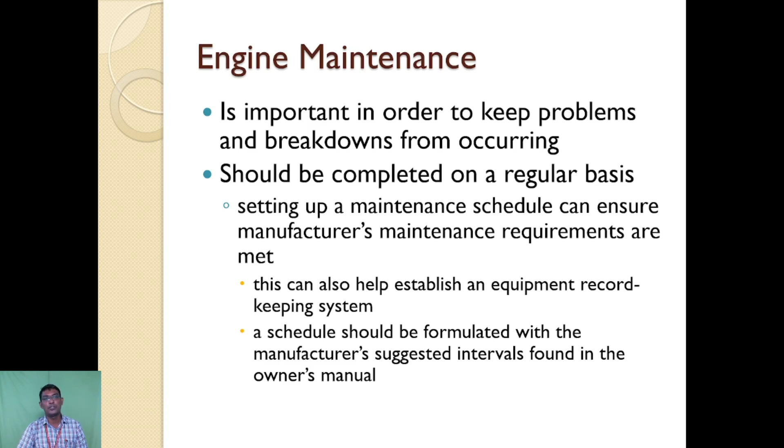First, you should know about engine maintenance. What is engine maintenance and why do we go for it? Because engine maintenance is very important in order to keep problems and breakdowns from occurring. It should be completed on a regular basis, so periodically we should undergo inspection. Setting up a maintenance schedule can ensure manufacturer's maintenance requirements are met. This can also help establish an equipment record keeping system. A schedule should be formulated with the manufacturer's suggested intervals found in the owner's manual, meaning the maintenance manual prescribed by the concerned authority. This is the main purpose for undergoing engine maintenance.

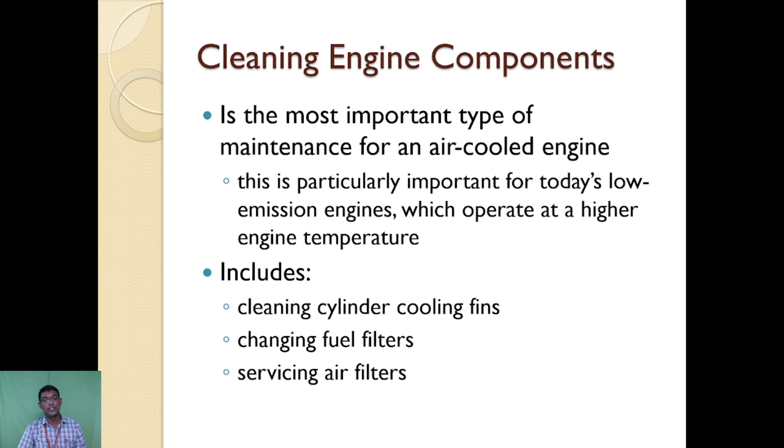Let us see cleaning of engine components first. This is the most important part of maintenance for an air-cooled engine system. This is particularly important for today's low emission engines, which operate at higher engine temperatures. This includes cleaning of cylinder cooling fins, changing of fuel filters, and servicing of air filters.

Let us see cleaning of cylinder cooling fins. This is very important in order to properly maintain the transfer of heat, so that the cylinder cooling fins are properly actuated. The fins around the engine and on the cylinder head act as a heat transfer medium. The heat already generated by combustion travels through the fins to the atmosphere. This is why we clean the cylinder cooling fins. Accumulation of dirt, particles, impurities or debris on the fins acts as an insulator which blocks the transfer of heat.

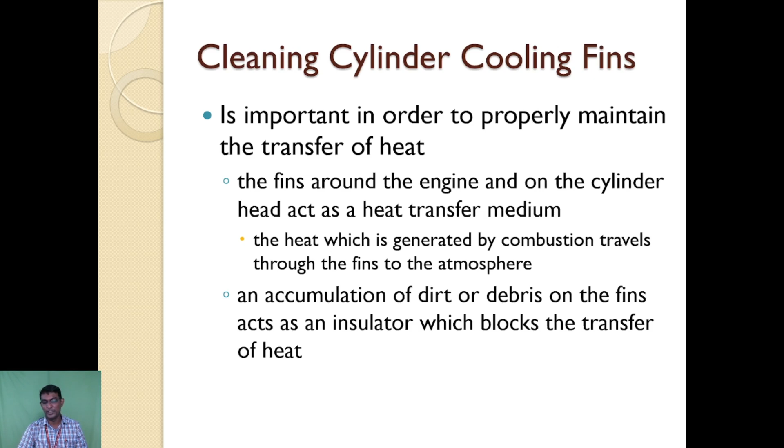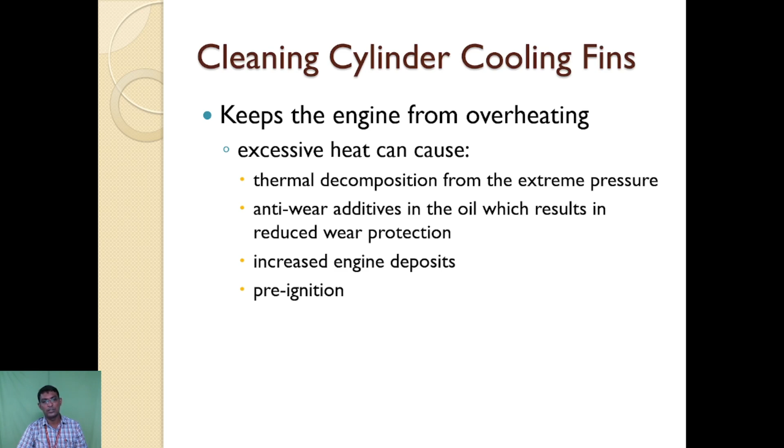This is also very important in keeping the engine from overheating, because excessive heat can cause thermal decomposition from extreme pressure conditions, and degrade anti-wear additives in the oil, resulting in reduced wear protection. It also increases engine deposits, as impurities can sediment in the cylinder cooling fins, and finally pre-ignition can occur.

Next case, changing of fuel filters. What is the purpose and necessity? Changing of fuel filters should be completed on a regular basis as said already. A completely blocked fuel filter will stop the engine from running. A partially blocked filter can cause the mixture to be very lean, which is a major cause of piston seizure, scuffing, or overheating failure.

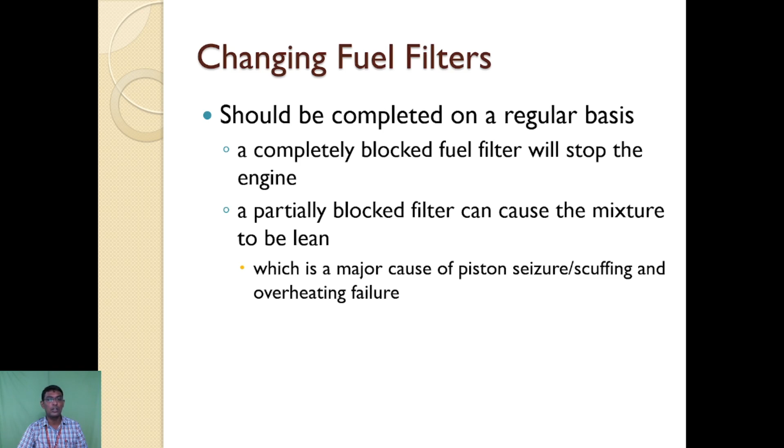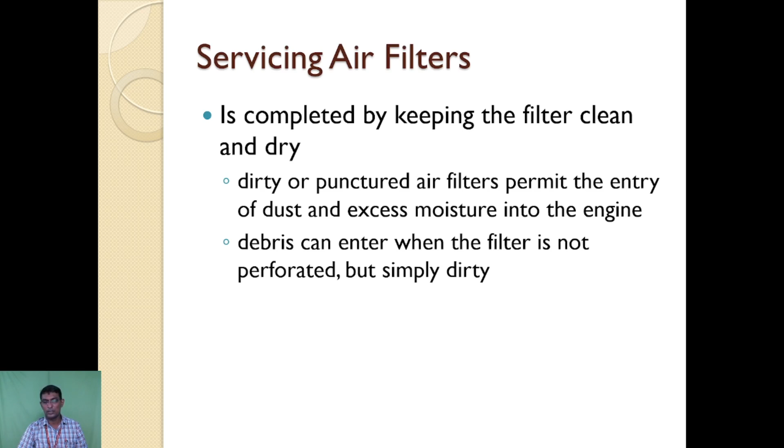Next, servicing of the air filter system. This process is completed by keeping the filter clean and dry. Dirty or punctured air filters permit the entry of dust and excess moisture into the engine system. Similarly, debris such as impurities and other substances can enter when the filter is not perforated properly but simply dirty. For that purpose, we service the air filters periodically.

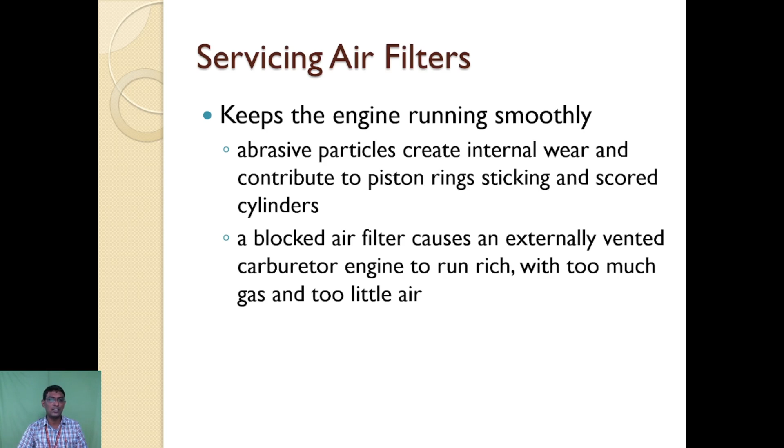This keeps the engine running very smoothly. Abrasive particles create internal wear and contribute to piston rings sticking and scored cylinders. These are the possible limitations addressed by servicing the air filters to keep the engine running smoothly. A blocked air filter causes an externally vented carburetor engine to run rich, with too much gas and too little air.

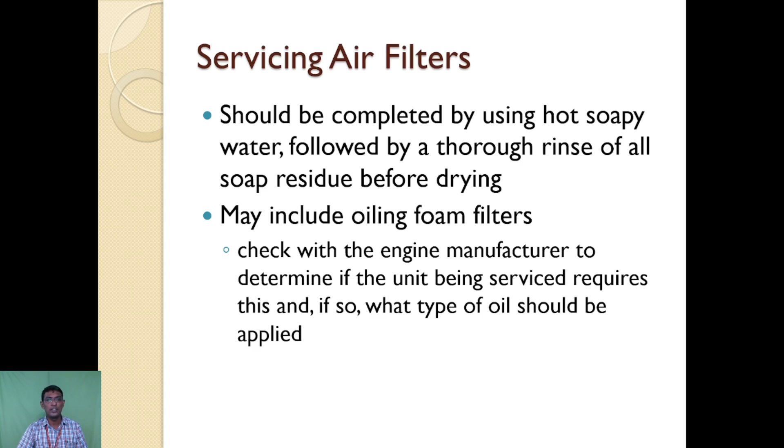Servicing should be completed using hot soapy water, followed by a rinse of all soap residue before drying the system. This may include oiling foam filters, so check the engine manufacturer manual to determine if the particular unit being serviced requires this, and if so, what type of oil should be applied. This is the condition to be followed during servicing of the air filter system.

Next, we are going for the carburetor.

Usually, the spark plug electrode area typically operates in the condition between the ranges of 700 degrees Fahrenheit and 1500 degrees Fahrenheit. Less than 700 degrees Fahrenheit normally will cause a buildup of carbon, which will short or foul the spark plug, and sometimes eventually stop the engine from running.

Similarly, around 1500 degrees Fahrenheit, the spark plug center electrode will begin to glow, causing the combustion mixture to ignite before the spark occurs or is created. That is the pre-ignition system.

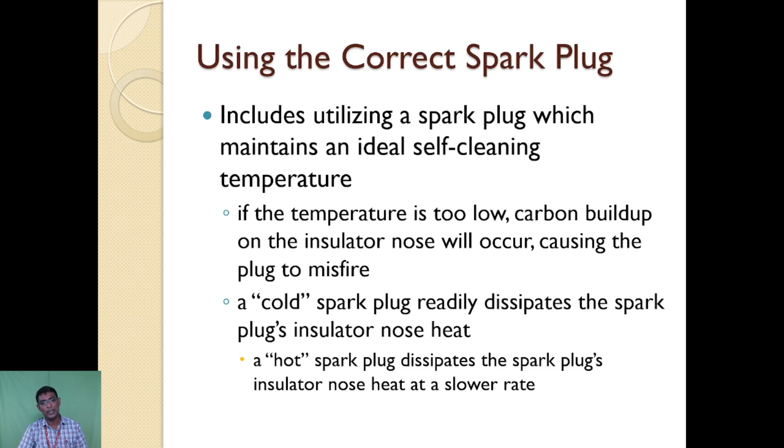This includes utilization of a spark plug which maintains an ideal self-cleaning temperature. If the temperature is too low, carbon buildup on the insulator nose will occur, causing the plug to misfire. That is what happens in the case of low temperature. Similarly, a cold spark plug readily dissipates the insulator nose heat, whereas a hot spark plug dissipates the insulator nose heat at a much slower rate.

Next, let us come to the carburetor. Servicing of the carburetor is important for the engine system. This should be included in a regular maintenance schedule, which includes carburetor adjustment, rinsing as well as cleaning, initial inspection, inspection of fuel inlet screens, and inspection of fuel bowls and float.

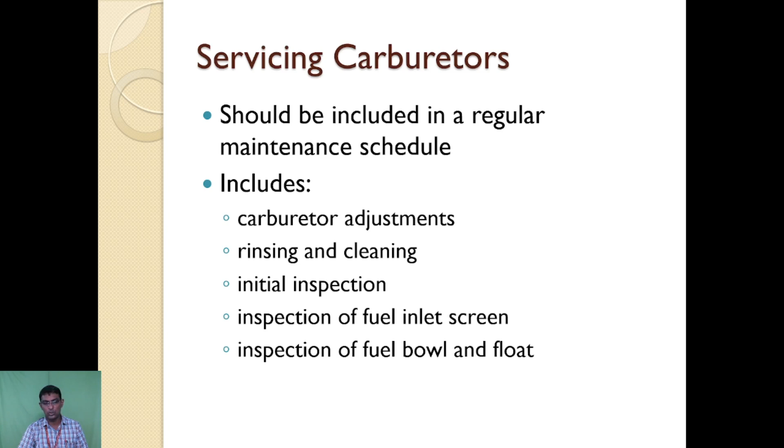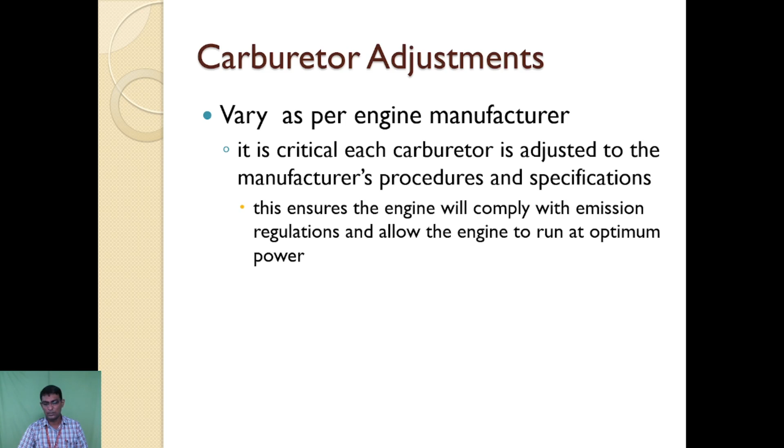Carburetor adjustments vary as per the engine manufacturer. It is critical that each carburetor is adjusted to the manufacturer's procedure and its corresponding specification. This ensures the engine will comply with emission regulations and allow it to run at optimum power. For that purpose, we have to adjust the carburetor periodically as per the manual. This is an important part of engine performance.

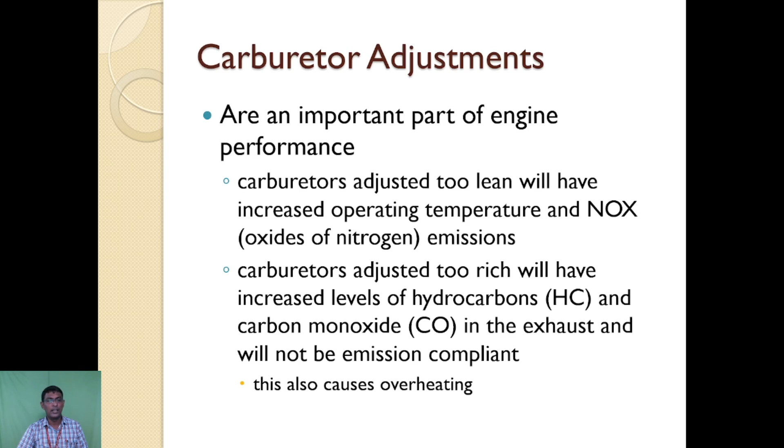Carburetors adjusted too lean will have increased operating temperature normally, and NOx, which is oxides of nitrogen emissions, will increase. Carburetors adjusted too rich will have increased levels of HC, such as hydrocarbons, and CO, carbon monoxide, in the exhaust, and will not be emission compliant. Similarly, this also creates overheating.

This may not be completed on all engines. Many small engines being produced today come equipped with non-adjustable carburetors, so we cannot adjust the carburetor on our own. Some small engines continue to use adjustable carburetors, where the low-speed and high-speed mixture needles are covered with a limiter cap.

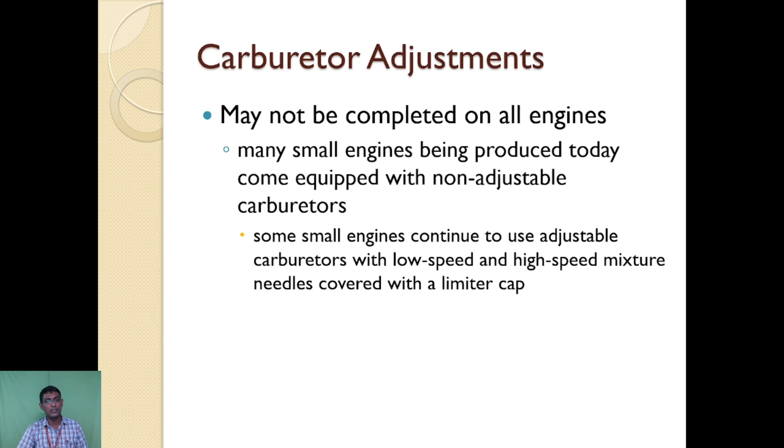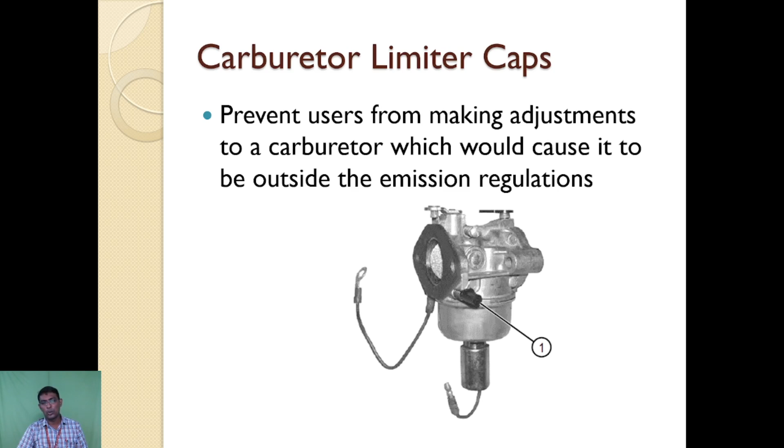This figure shows the carburetor with the limiter caps. What is the use? It prevents users from making adjustments to a carburetor that would cause it to fall outside the emission regulations. So whatever the type may be, we should follow the emission regulation protocols, without which we cannot adjust the carburetor on our own.

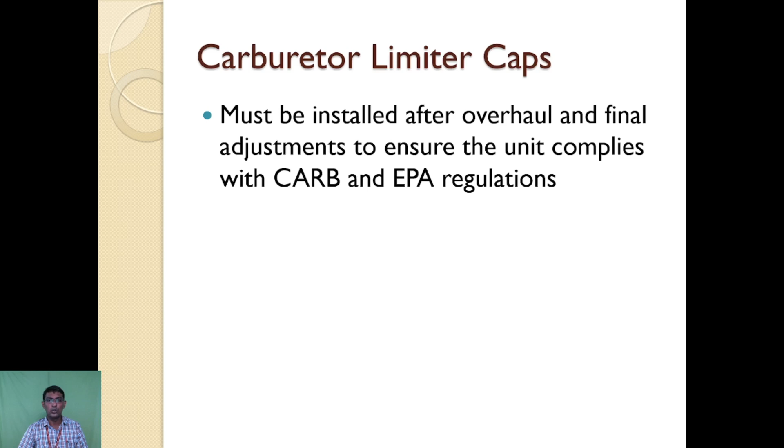Carburetor limiter caps must be installed after overhauling and final adjustments to ensure the unit complies with CARB as well as EPA regulations. So we should follow both of these regulations.

Next, rinsing as well as cleaning. Rinsing and cleaning plays a very important part in overhauling and maintenance. This is basically completed by using an ultrasonic cleaner, which is normally available in all maintenance areas and is the preferred method for cleaning carburetors and fuel system components. It may also be completed using an approved cleaning solvent.

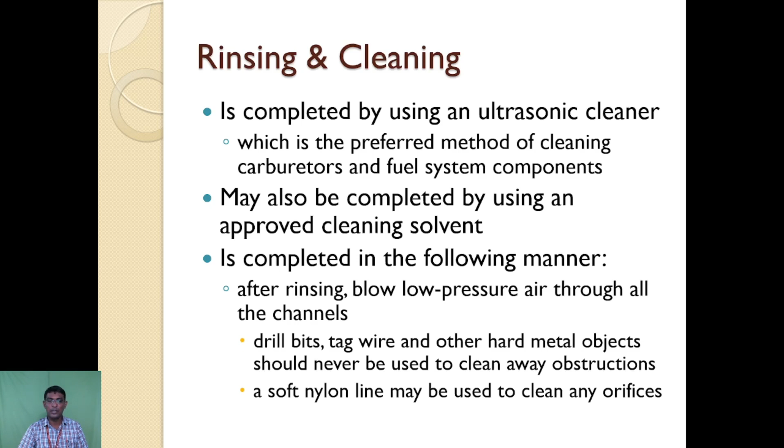This system is completed in the following manner: after rinsing, blow very low air pressure through all the channels. Drill bits, tag wire, and other hard metal objects should never be used to clean away obstructions. A soft nylon line may be used to clean any orifice paths.

Next, the fuel inlet screen. Inspect the fuel inlet screen in order to keep the carburetor functioning properly, and to verify the screen is not clogged. A clogged screen will restrict the fuel flow, affect acceleration, and impair high-speed performance.

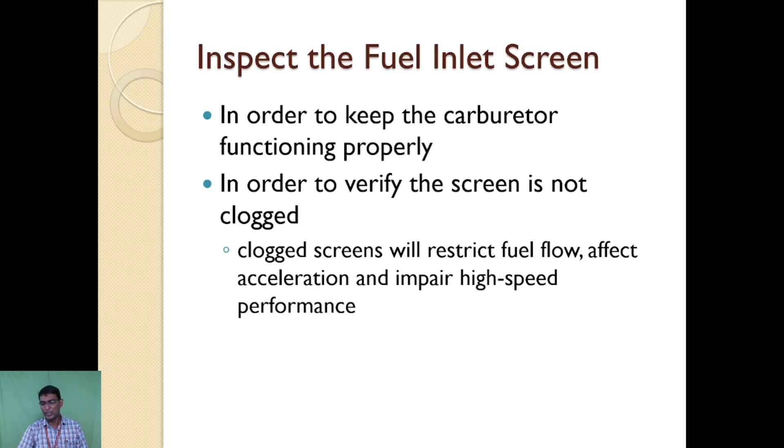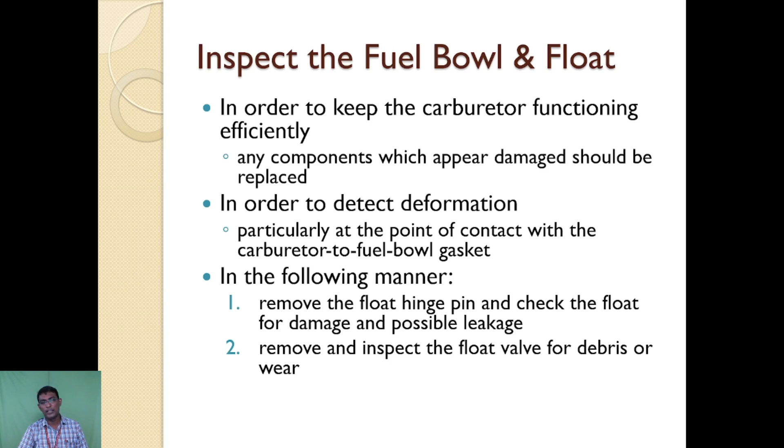In order to keep the carburetor functioning efficiently, we have to concentrate on the following points: any components which appear damaged should be repaired or replaced. To detect deformation, particularly at the point of contact, we should thoroughly check the carburetor to fuel bowl gasket. Remove the float hinge pin and check the float for damage as well as possible leakages. Remove and inspect the float valve for debris as well as wear.

Next, we are going to deal with the EFI, the electronic fuel injection system, and how to service and maintain it. EFI includes maintaining the tank such as the petrol tank, fuel pump, filter, throttle body as well as injector.

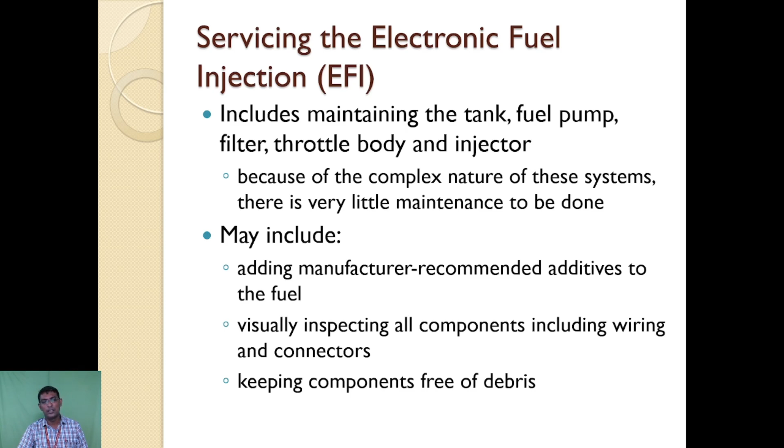Because of the complex nature of the system, there is very little maintenance to be done to rectify the problem. This may include adding manufacturer recommended additives to the fuel, visually inspecting all components including wiring and connectors, and keeping the components free of debris such as dirt and impurities.

Next, engine storage: preparing engines for storage condition. It's an important point to keep the engine running smoothly, since a season of bad storage can do more damage than several seasons of operation. Similarly, damage from rust and corrosion, plugged carburetor passages, and stale fuel can lead to problems the next time the engine is used. It includes preparing the fuel tank and fogging of the engine.

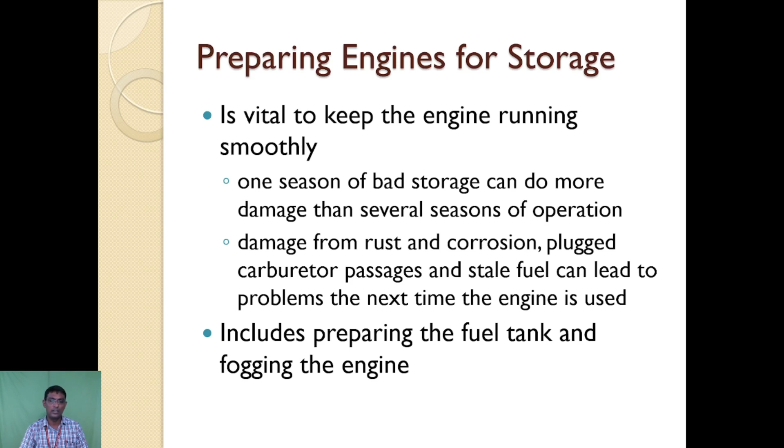Next, preparing the fuel tank. This includes completely draining all the fuel from the fuel tank as well as from the carburetor. During in-season use, fuel additives can be added to fuel to decrease the oxidation process. The additive is only effective if it is added to fresh fuel.

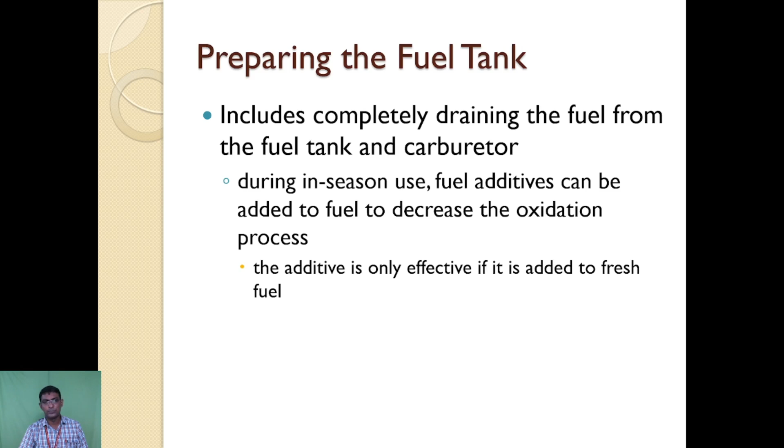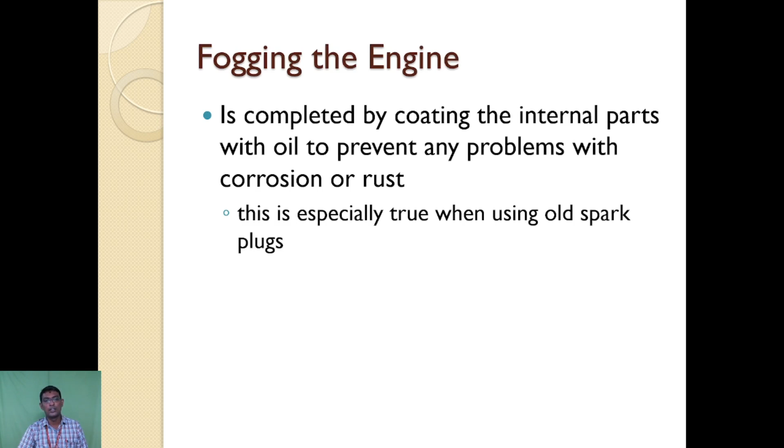Next, engine fogging. The fogging concept is completed by coating the internal parts of the engine with oil to prevent any problems with corrosion or rust. In simple terms, to prevent corrosion or rust, we can go for engine fogging. This is especially true when using the old spark plug condition.

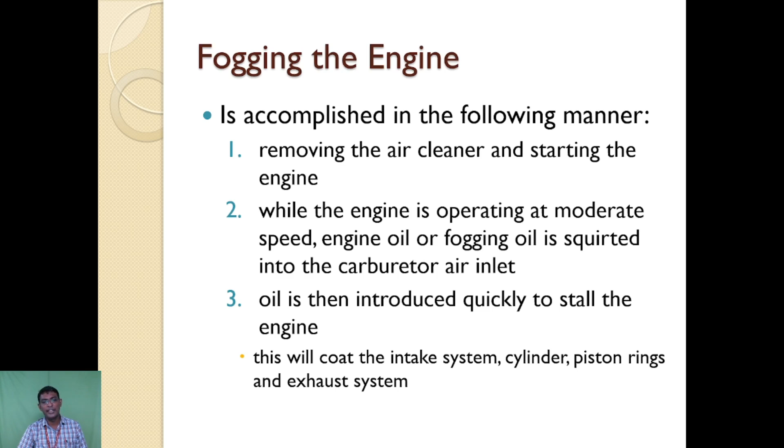Steps to be accomplished for fogging the engine: remove the air cleaner and start the engine. While the engine is operating at a moderate speed, engine oil or fogging oil is normally squirted into the carburetor air inlet, then oil is introduced quickly to stall the engine. While doing this process, this will coat the intake system, cylinder, piston rings, and exhaust system.

Then servicing of ECP, emission control parts, which includes the exhaust system, spark plug, fuel tank, fuel feed line, air filters, carburetors, ignition module, as well as flywheel. Next we move on to the case for fuel tank permeation.

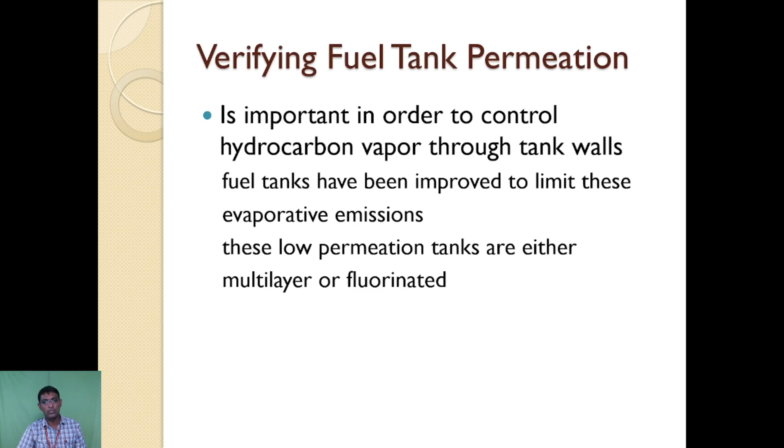It's very important to control the hydrocarbon vapor through tank walls, which normally occurs. Fuel tanks have been improved to limit these evaporative emissions. For that purpose, these low permeation tanks are either multi-layer or fluorinated.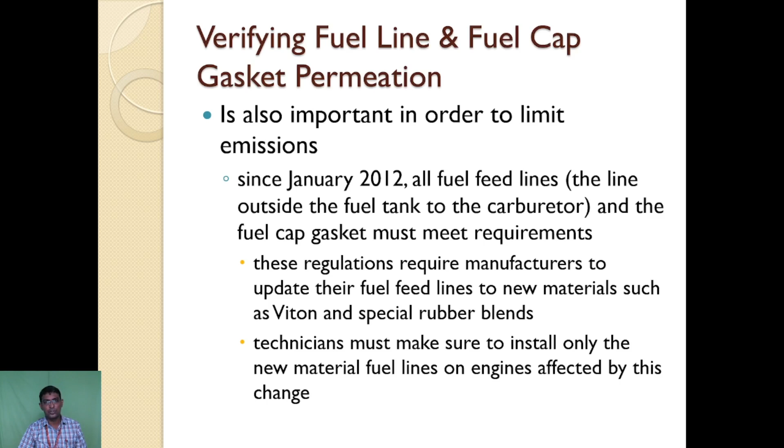So these are all the steps for verifying the fuel line and fuel cap gasket permeation.

Next, we are going for troubleshooting. Troubleshooting is the overall diagnostic procedure, a systematic approach to solving the problem dealing with engine performance. These are all the services offered by equipment manufacturers and engine technicians. They should address specific issues, whatever the issues may be.

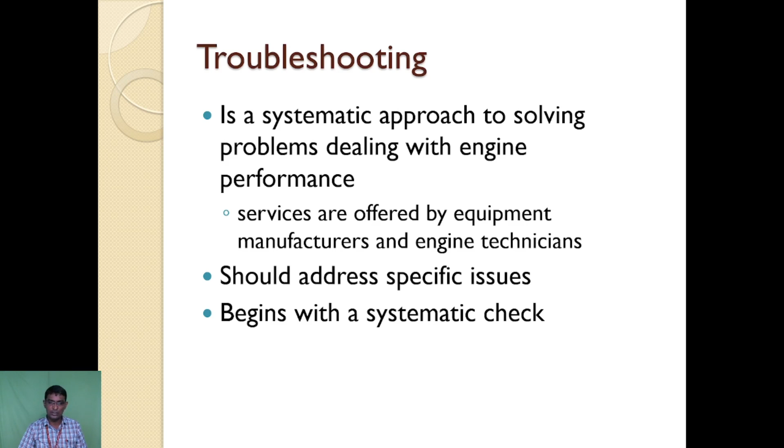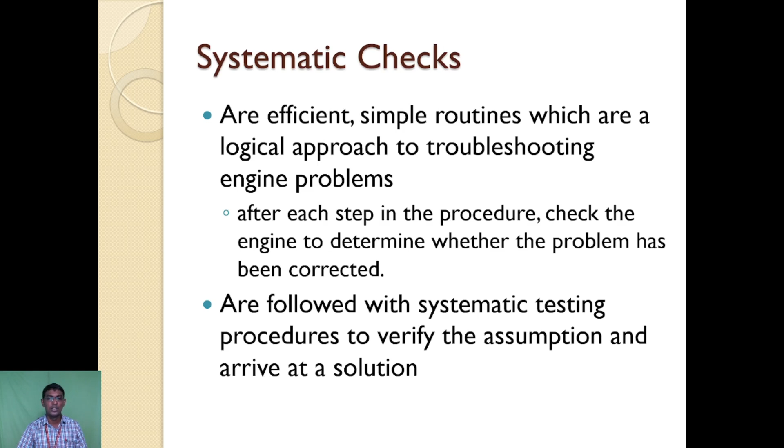Troubleshooting begins with a systematic check. So what are these systematic checks? They are efficient, simple routines which follow a logical approach to troubleshooting engine problems. After each step in the procedure, check the engine to determine whether the particular problem has been corrected or not. The systematic checks are then followed by systematic testing procedures in order to verify the assumption and arrive at a solution.

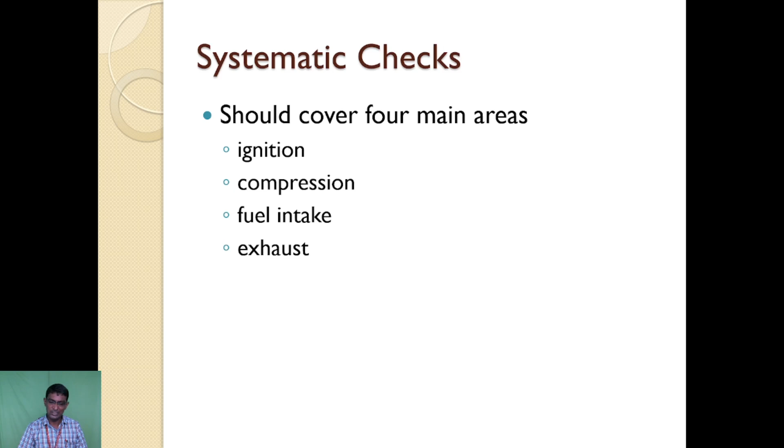Mainly the systematic checks cover four main areas: ignition, compression, fuel intake as well as exhaust. Ignition system inspection is periodically conducted by checking for spark with a tester which is able to load the ignition system, basically dealing with a 3-point spark tester.

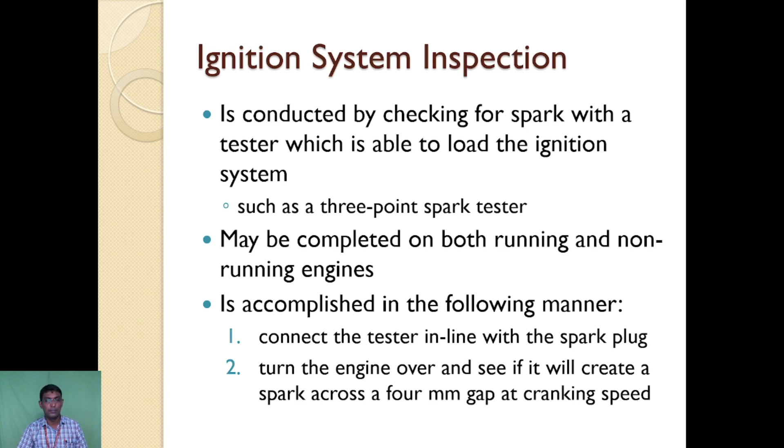This may be completed on both running and non-running engines. First, connect the tester in line with the spark plug, then turn the engine over and see if it will create a spark across the normal size 4 mm gap at cranking speed. This figure shows the ignition system inspection. The main concept is the gap adjustment.

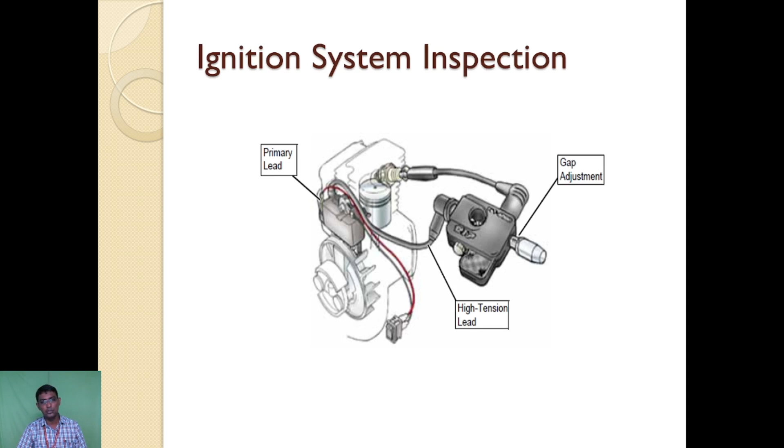Then here the high tension lead is connected. Then the primary source lead, which is connected to the entire ignition system setup.

So next, suppose the case is failure, what is the solution? Failure of ignition system inspection is apparent when a spark is not present or sometimes it is weak. So isolate the on-off switch and disconnect it. You should carefully do this procedure. Then check for spark, whether it is coming or not. If the engine still fails this test, additional checks of the module will need to be done prior to replacement, such as testing of the module ground resistance along with the primary and secondary leads.

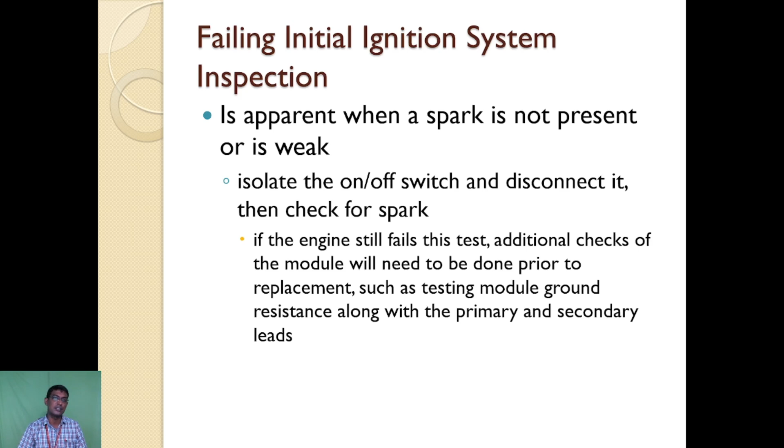Then suppose we are undergoing a second test. What is the second test and what are its basic procedures? You open the tester to a gap of 6 mm. In the same case, if the spark continues, this will ensure the ignition system is putting out adequate voltage to start and run the engine.

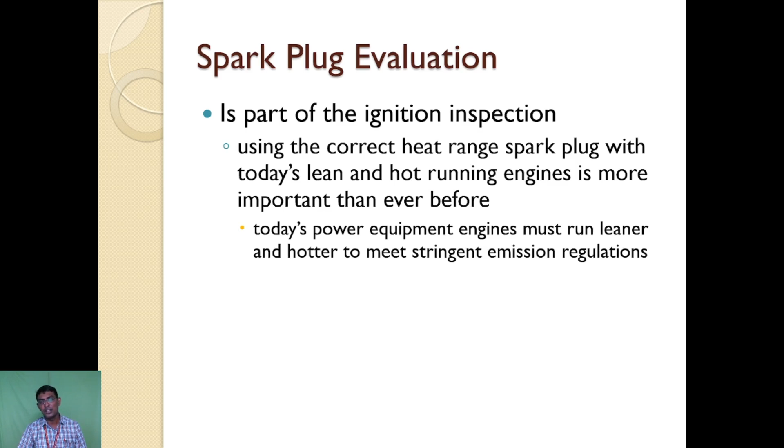Then evaluation of the spark plug is an important part of the ignition inspection. Using the correct heat range spark plug with today's lean and hot running engine is more important than ever before. So we should carefully do this process. Today's power equipment engines must run leaner and hotter to meet the stringent emission regulations. So we should carefully follow the regulation policy as well as procedures for carrying out these evaluation methods.

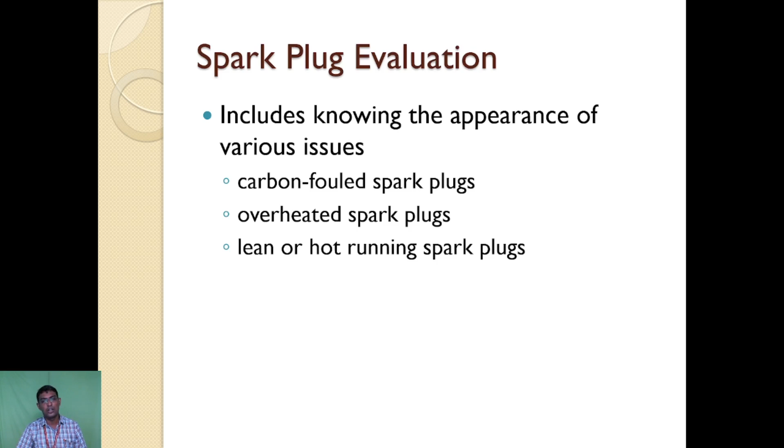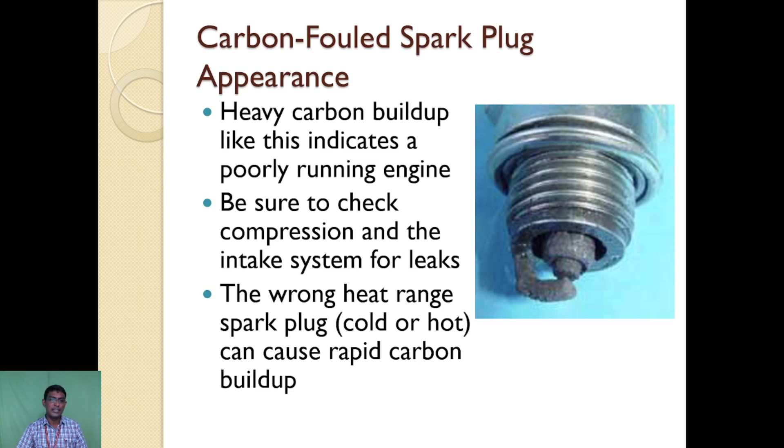Whether a leak is available or not, we should check with the compression testing process, which we will discuss in the next step. The wrong heat range spark plug, cold or hot, whatever type it may be, can cause rapid carbon buildup.

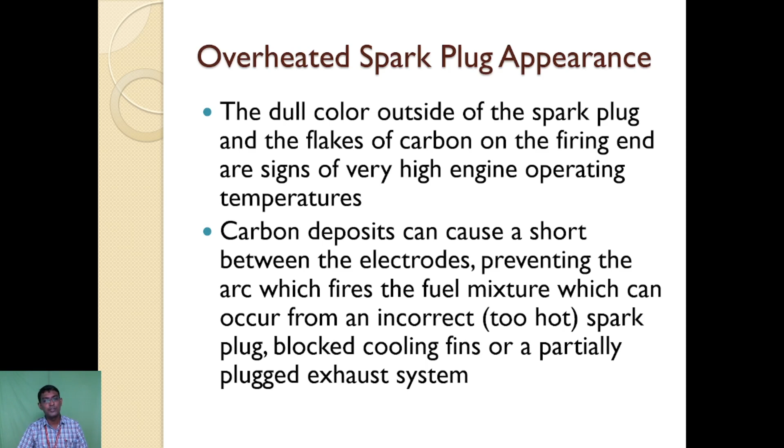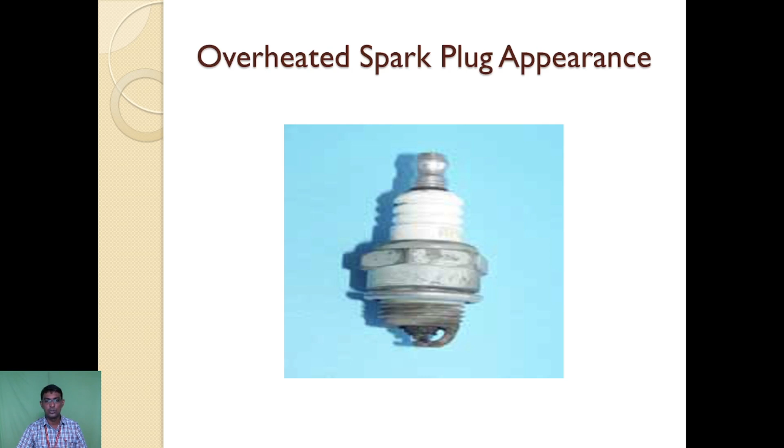This corroded spark plug is a comparison for lean or hot running spark plug appearance. You can see the difference between these three figures. A spark plug with a white insulator and eroded electrode indicates the engine is running very lean and hot. You can notice the glazed porcelain and peppery specks on the insulator, which are signs that the plug is badly overheated. So simply, we can say it is a bad condition spark plug.

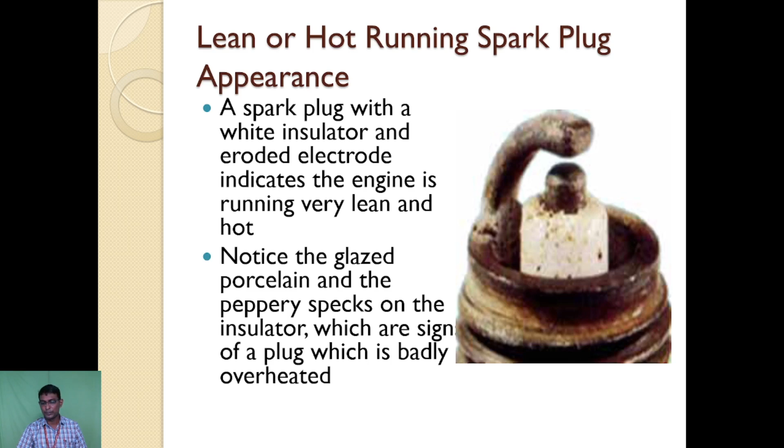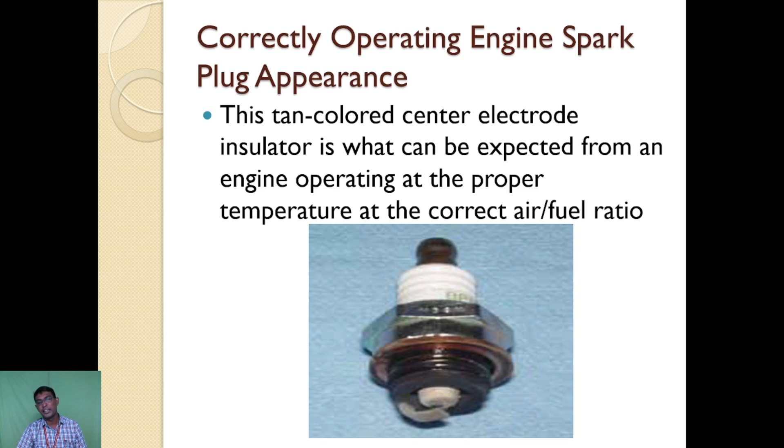Okay, next we are going for the correctly operating engine spark plug appearance. This tan colored center electrode insulator is what can be expected from an engine operating at the proper temperature with the correct air fuel mixture ratio.

Next we are going for the compression test. Why, what, and when is it necessary? In general, compression test is necessary in order to identify particular cylinder leakages. For that purpose, we undergo compression test operations. Compression tests are used to verify low compression diagnosis, such that a special compression test adapter and gauges which can safely read above the maximum expected PSI, pounds per square inch, must be used.

These are performed in the following manner, some points to recollect. First, remove the spark plug. After removing the spark plug, block the throttle plate fully in the open condition. Then install the gauge adapter into the spark plug hole. Then rotate the engine until the gauge stops increasing.

These are useful in checking for a difference of cylinder conditions in multi-cylinder engines. Compression tests can be carried out by two methods: direct compression and differential compression test check. We will see them one by one.

Ensure all PSI ratings do not differ by more than 10% variation. A difference in compression between cylinders does not automatically mean there is a problem with the piston or cylinder bore. The problem may be automatic compression release or valve lash related issues.

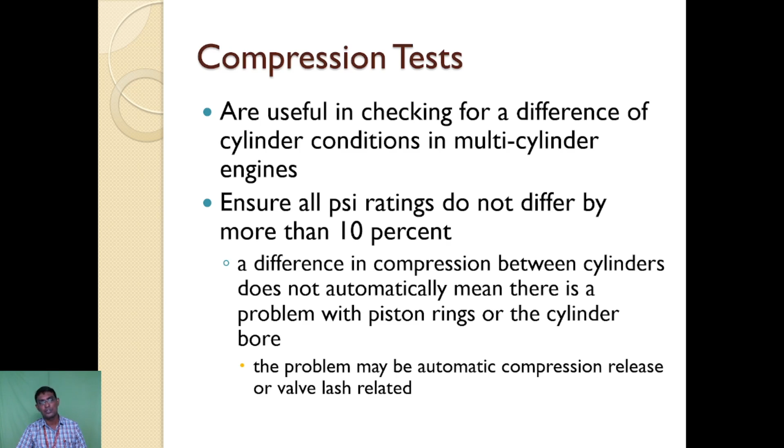Next, the wet compression test. This should be performed if a dry compression test indicates a very low compression. It's performed by adding a small amount of oil to the cylinder and repeating the same compression check process. This should indicate higher compression than the dry compression check, because oil creates a better seal against the top of the piston rings as well as the cylinder bore.

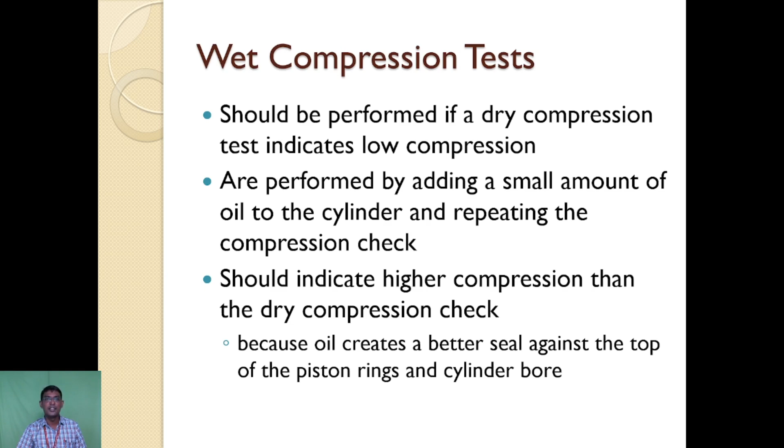Cylinder leakage tests, as already mentioned, are considered a more accurate way to test for excessive combustion area leakage compared to a compression test. This is due to a majority of small engines being equipped with an automatic compression release, such as ACR, to ease starting. This is used to check for excessive pressure loss in the combustion area.

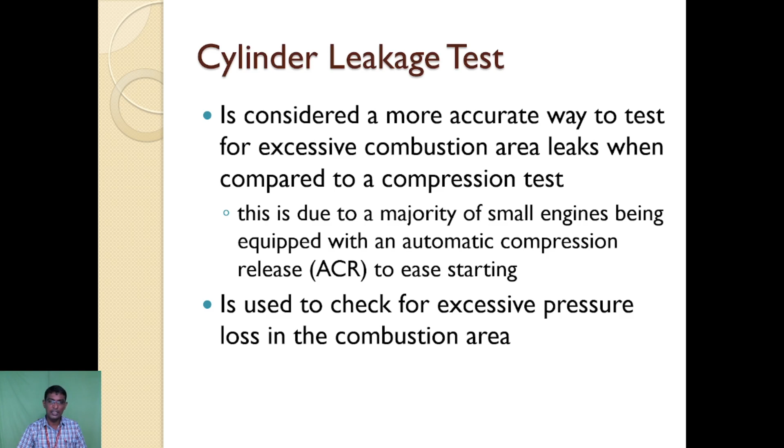The cylinder leakage test requires the following conditions: both intake and exhaust valves must be fully closed, a moisture-free compressed air source must be available, the ACR is disengaged while testing, and the push rods are removed at BDC, bottom dead center, to ensure that no valves are open.

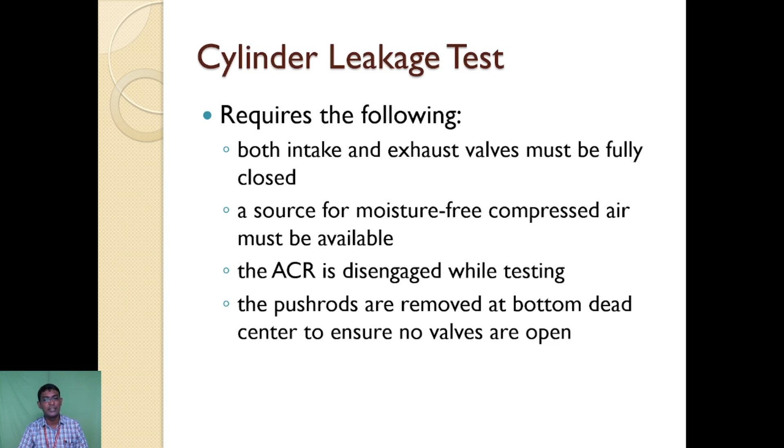Then run the engine long enough to reach operating temperature. Remove the spark plug of the engine cylinder to be tested, then remove the air cleaner and oil fill plugs. Rotate the crankshaft to bring the piston in the cylinder to TDC, top dead center, on the compression stroke. TDC on the exhaust stroke will result in both intake and exhaust valves open. This should always be done rotating in the running direction.

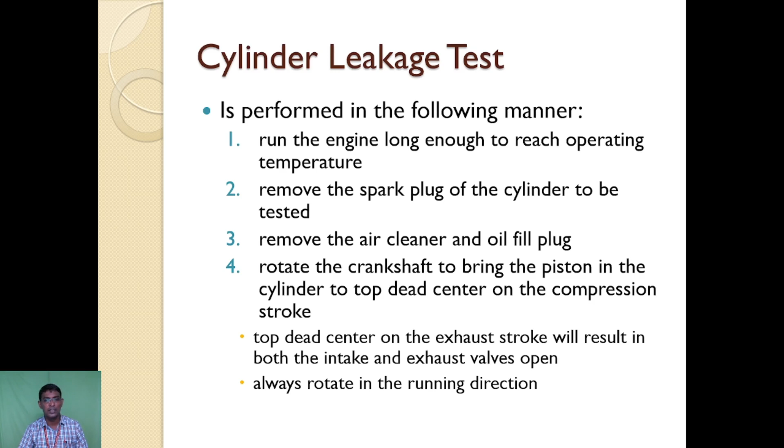Then install the tester adapter hose in the spark plug hole. Verify the regulator. The pressure regulator is set to zero and connect the air supply. Excessive pressure can damage the engine components as well as seals.

Connect the tester to the tester adapter hose. Obtain readings as per the test manufacturer specifications. All these points should be carefully incorporated while doing the cylinder leakage test.

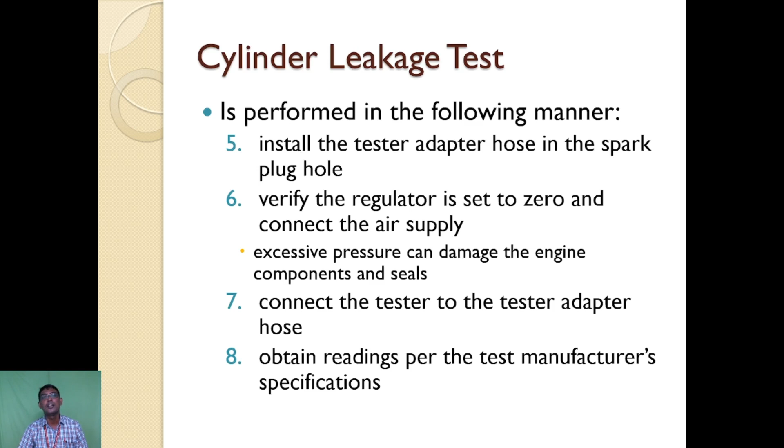Cylinder leakage test readings: some may be unacceptable. In this case, you have to determine where the leak is coming from by listening for hissing air noise.

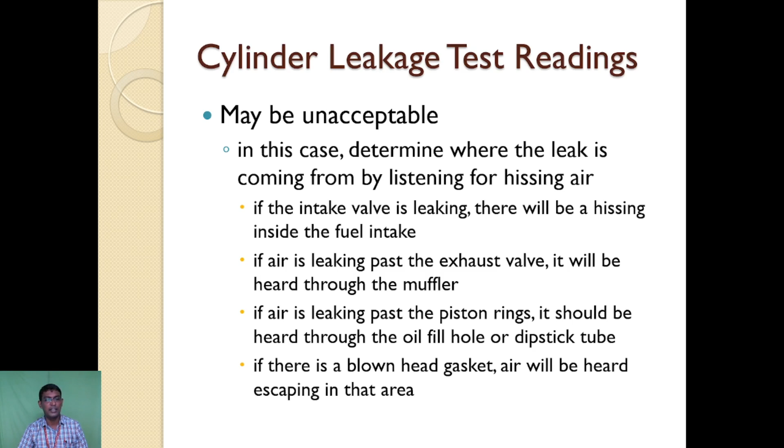If the intake valve is leaking, there will be a hissing inside the fuel intake. If air is leaking past the exhaust valve, it will be heard through the muffler. If air is leaking past the piston rings, it should be heard through the oil fill hole or dipstick tube. If there is a blown head gasket, air will be escaping in that area, and you can hear it.

Next, fuel system inspection. So far we have discussed various maintenance topics, and another important concept is fuel system inspection. It's a very important part of troubleshooting engines. Fuel systems are responsible for a significant amount of failures a technician will encounter.

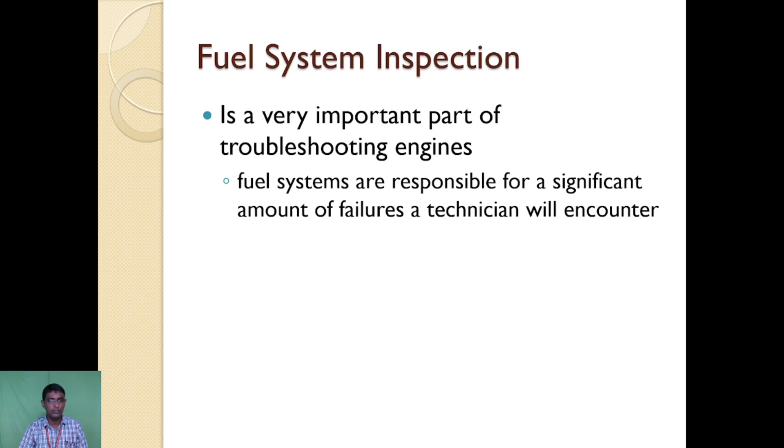Fuel system inspection points: inspect the fuel by obtaining a sample from the carburetor for contamination such as water, debris and incorrect fluids. If the fuel is old and starting to turn to varnish, you may notice a skunk-like smell, which means the fuel has already spoiled, and the fuel system will have to be cleaned or flushed to get the unit to run properly again.

Check the fuel tank for contamination if any impurities are present. Make sure the fuel filter is installed and not dirty, which could cause a lean operating condition and overspeed at wide open throttle.

Check the fuel line for any signs of holes or cracks. Ensure limiter caps are adjusted at the rich stop. Examine the fuel system for leaks. Check the fuel intake system, hoses and tanks for damage, and check for fuel on the outside of all these components.

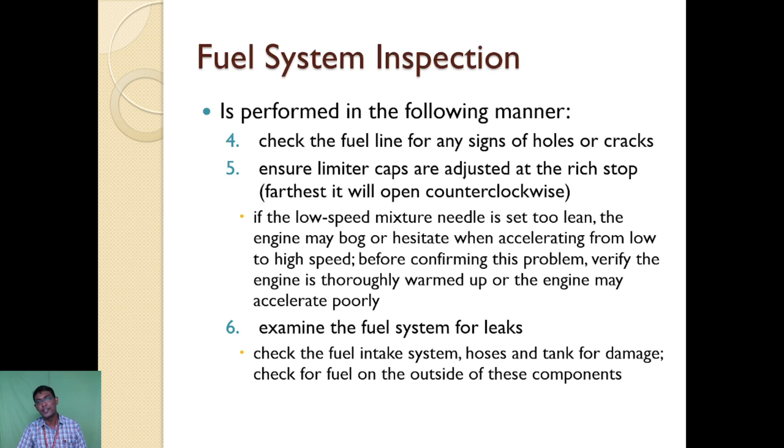Using both the pressure and vacuum test, you have to determine if the fuel tank vent is working properly or not. Most fuel tank vents are a two-way system, with incoming as well as outgoing parts. Air is let into the tank as fuel is consumed, and similarly air is released as pressure increases inside the tank from expanding fuel vapors.

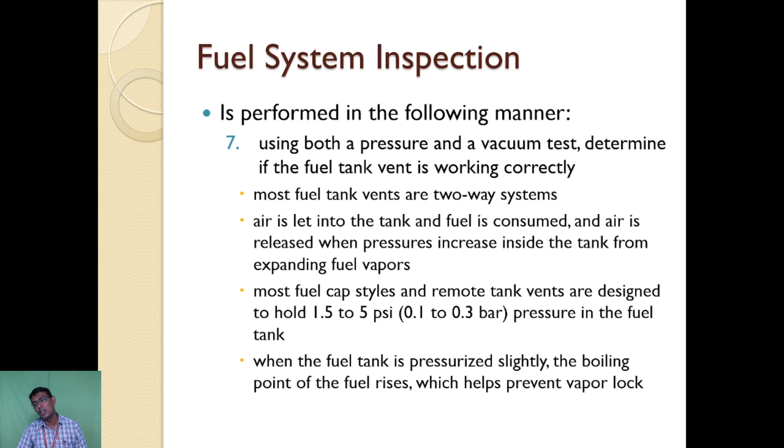Most fuel cap styles and remote tank vents are designed to hold 1.5 to 5 psi, normally 0.1 to 0.3 bar pressure in the fuel tank. When the fuel tank is pressurized slightly, the boiling point of the fuel automatically rises, which helps prevent vapor lock. Then pressure test the fuel tank for leaks.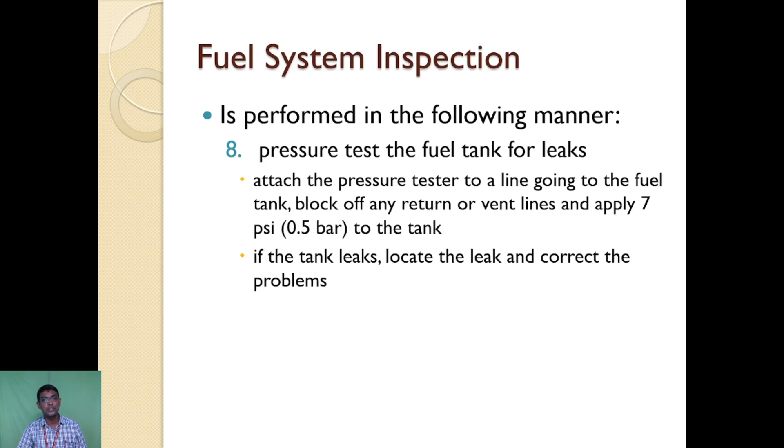In order to determine if the tank is leaking or not, we have to do a pressure test. Attach the pressure tester to a line going to the fuel tank. Block off any return or vent lines and apply 7 psi, that is 0.5 bar, to the tank initially. If the tank leaks, locate the leak and correct the problem. If it's not leaking, the tank is in good condition.

Then inspect the carburetor and rebuild if possible, if the pressure test of the carburetor fails or contamination is suspected during the process. A carburetor rebuild process will be required.

If the throttle shaft is worn with up and down movement, the carburetor will need to be replaced due to air and dirt being pulled into the engine. The carburetor requires replacement when a technician sees a worn throttle shaft or rotor, corrosion, extreme varnish inside the carburetor body, bent or grooved adjustment mixture needle, leaking fuel inlet needle seat, or a bad main nozzle check valve.

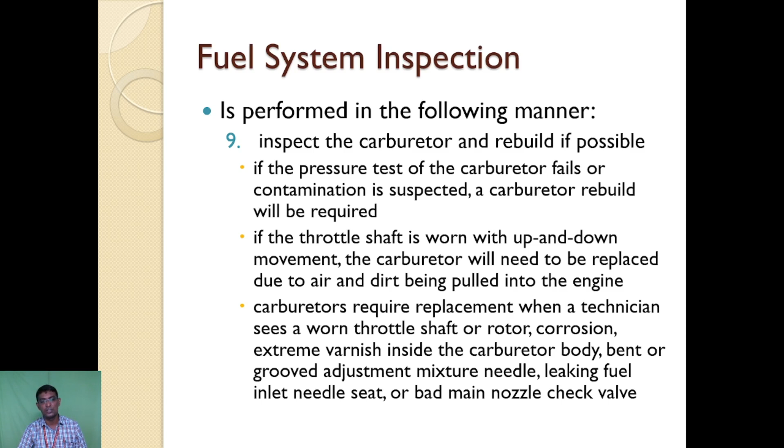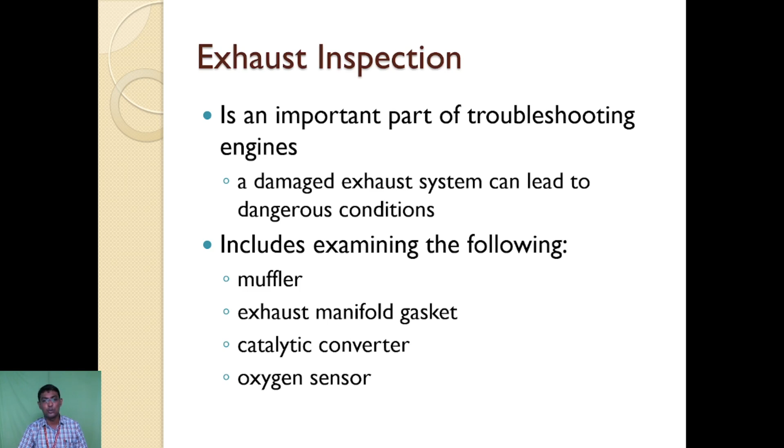Next, exhaust inspection is an important part of troubleshooting engines. A damaged exhaust system can lead to dangerous conditions. It includes examining parts such as the muffler, EMG (exhaust manifold gasket), catalytic converter and oxygen sensors.

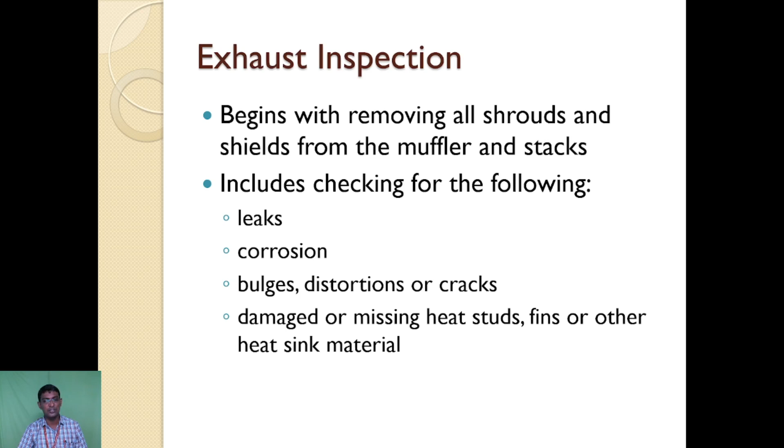It begins with removing all shrouds and shields from the muffler and stacks. It includes checking for leaks, corrosion, bulges, distortion or cracks, damaged or missing heat studs, fins, or other heat sink material.

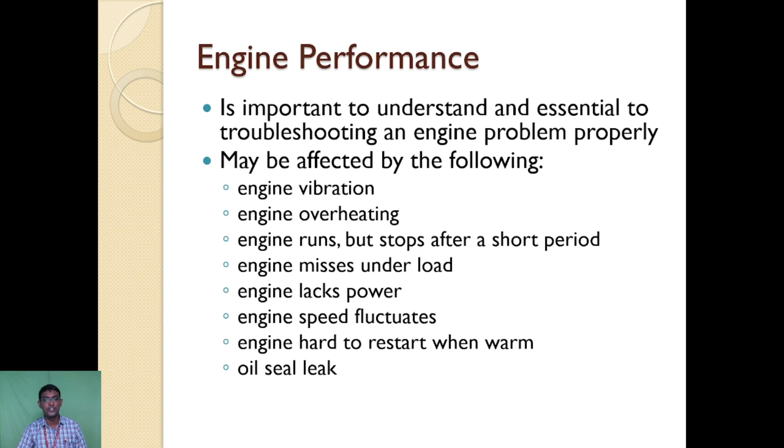Engine performance may be affected by conditions such as engine vibration, engine overheating, engine runs but stops after a short period of time, engine misses under load, engine lacks power, engine speed fluctuates, engine hard to restart when warm, and oil seal leaks.

We will discuss one by one. Engine vibration may be due to engine mount broken, not secured, or not seated properly, or sometimes a bent crankshaft, out of balance cutting attachment, gear case issues, or bent drive shaft.

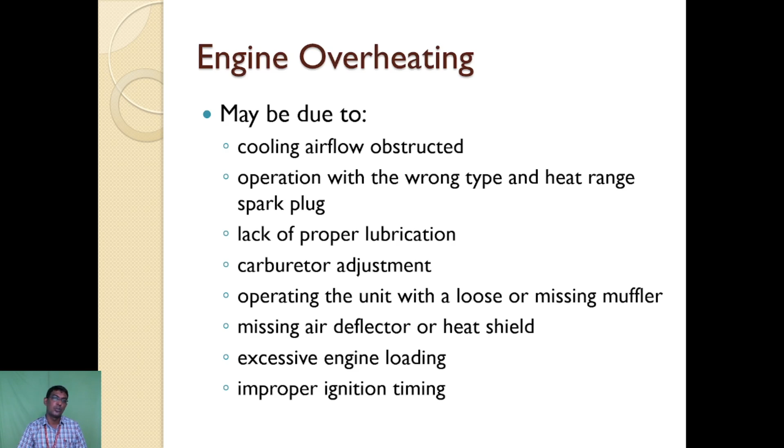Engine overheating may be due to cooling airflow obstruction, operation with the wrong type and heat range spark plug, lack of proper lubrication, carburetor adjustment, operating the unit with a loose or missing muffler, missing air deflector or heat shield, excessive engine loading, or improper ignition timing. These are all the possible conditions for engine overheating.

Engine runs but stops after a short period of time. This may be due to fuel tank vent problems, carburetor float vent problems, debris, excessive engine heat, ignition system issues, insufficient or no engine pulse to the fuel pump, and bad fuel.

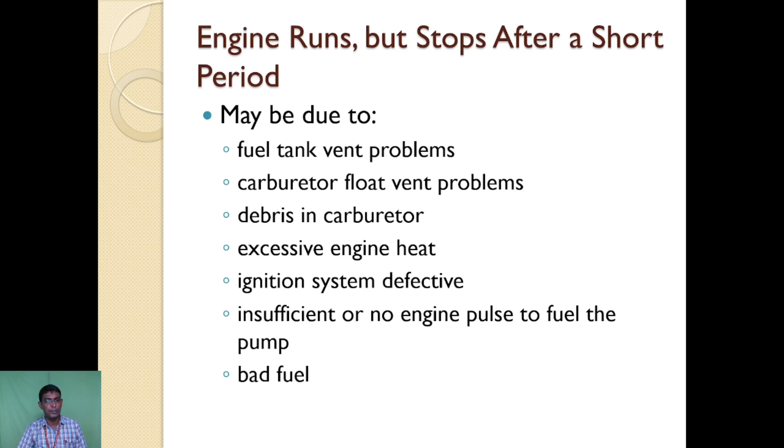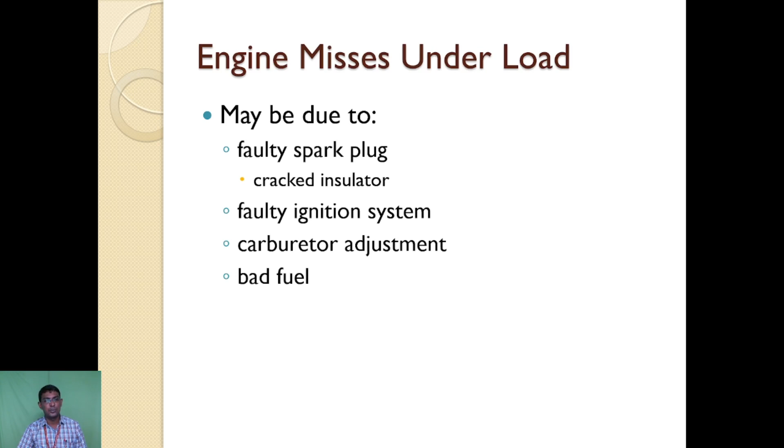Engine misses under load. This is mainly due to a faulty spark plug with cracked insulator, faulty or mismatched ignition system, carburetor adjustment, and bad fuel.

Engine lacks power. This may be due to a dirty or plugged air cleaner, choke partially closed, excessive engine heat, cylinder head leaking, broken piston rings, exhaust port clogged, throttle not operating fully, low compression, and bad fuel.

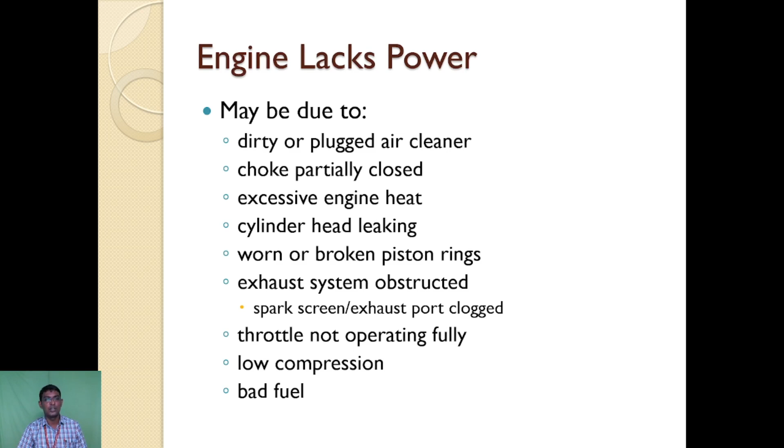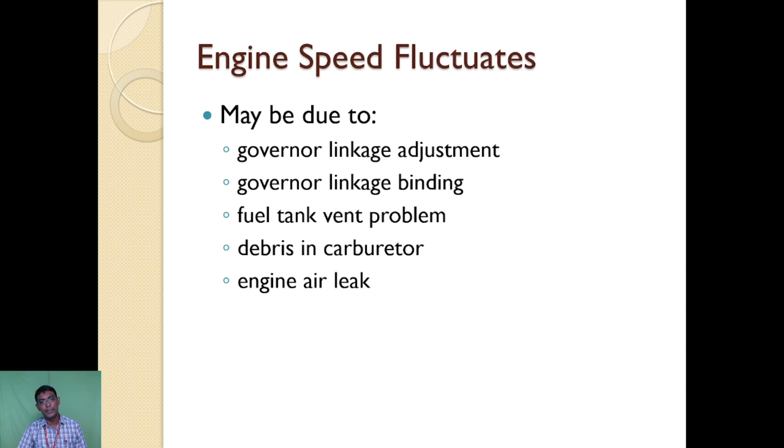Engine speed fluctuates may be due to governor linkage adjustment, governor linkage binding, fuel tank vent problems, debris in the carburetor, or engine air leaks. Engine hard to restart when warm...

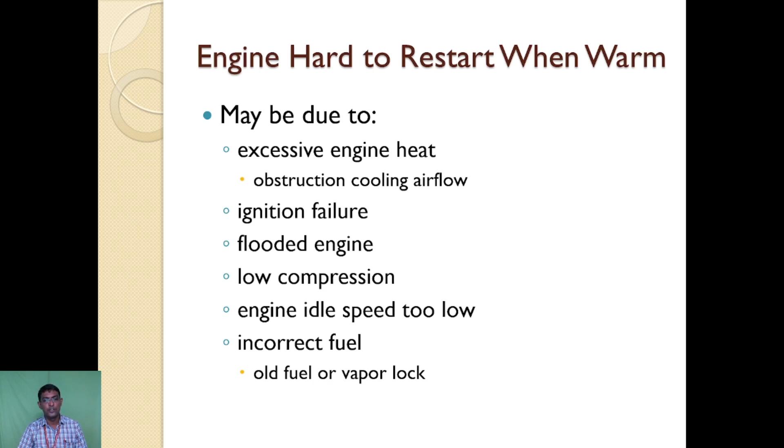Such conditions may be due to excessive engine heat, obstructed cooling airflow, ignition failure, flooded engine, low compression, engine idle speed too low, or incorrect fuel such as old fuel or vapor lock.

The last one is oil seal leak. This may be due to the oil seal being worn or damaged, worn crankcase bearing or bushing, oil seal improperly installed, or loss of crankcase vacuum. These are all the possible conditions that exist for these oil seal leakages.